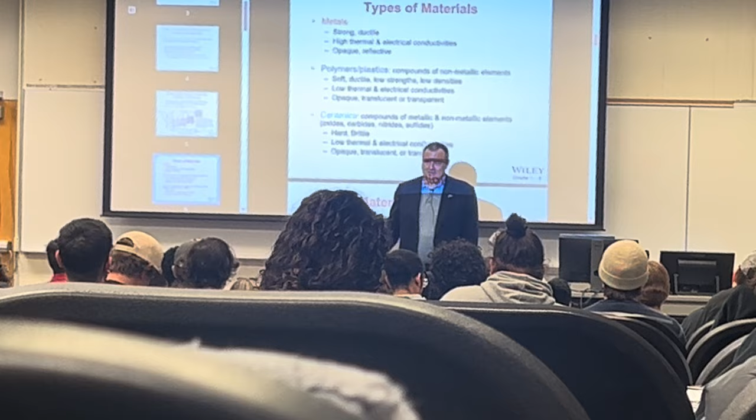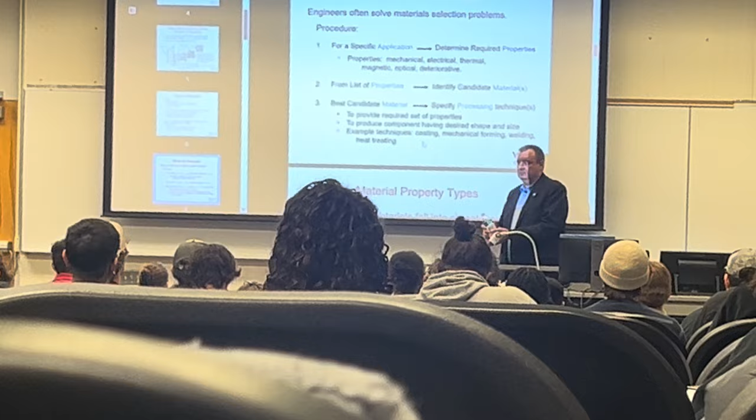And it doesn't break, but if I'm not lucky, I'll be cleaning up the mess for the rest of the class, right? So ceramics are intrinsically brittle. Polymers and plastic are typically ductile. But then imagine I put it in the liquid nitrogen, the whole thing. It wouldn't matter if it's plastic, or if it's metal, or if it is ceramic. When I drop it, it's going to shatter.

There are several ways to teach materials and engineering. So you would start from an application. And just like the beverage container, what is the set of properties that we're looking for? And typically there are mechanical properties, electrical, thermal, magnetic, optical, deteriorative.

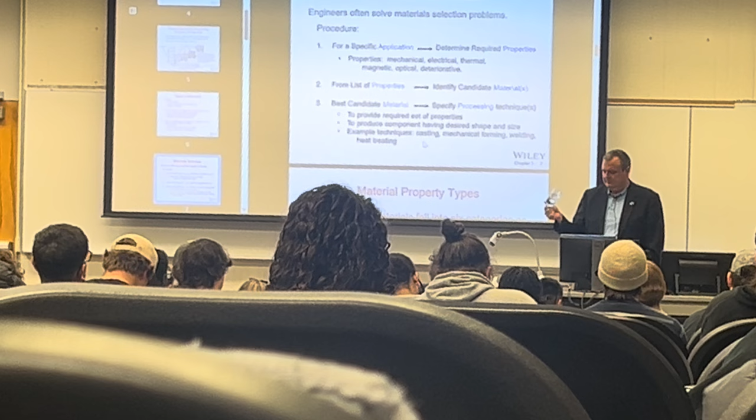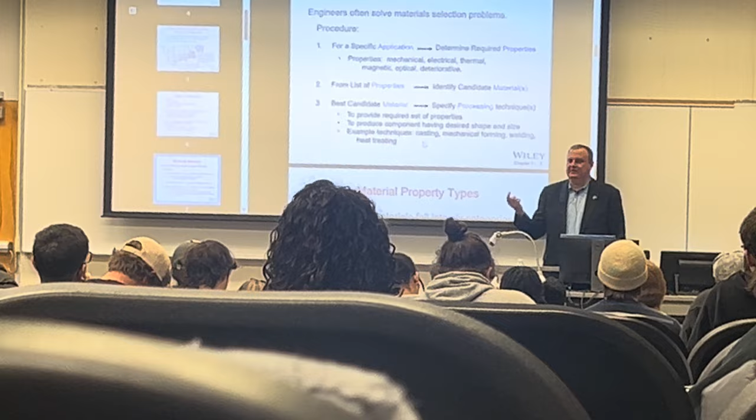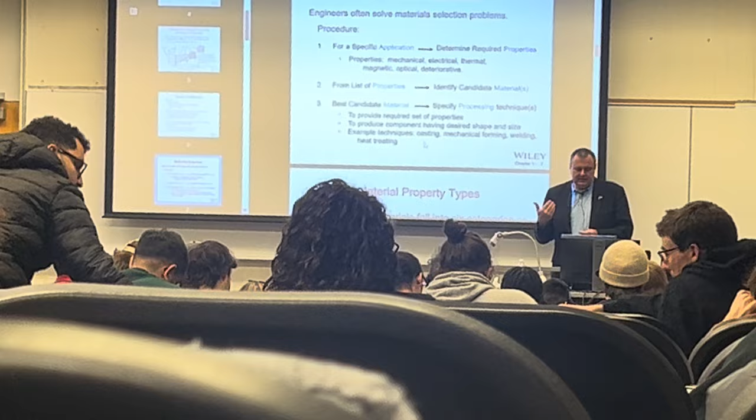A cell phone. What's the case made from? Not on this one. Well, I'm not talking about this case, I'm talking about the actual phone. Yeah, I don't know why Apple would take a metal that they used to have, it used to be an aluminum case, right, and put a glass on the back so that when you drop it, it shatters. It's just, to me, it's not a practical design because you're going to drop your phone no matter what. But basically, you're looking at a set of properties. And then you take those lists of properties and you get the candidates.

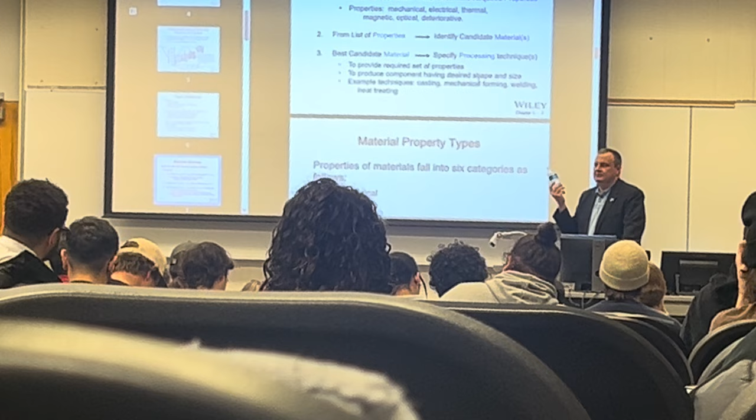What is this bottle made from? Okay, and what's that plastic made from? Oil. And what's oil made from? And hydrocarbons came from? Did you say stars? That's a philosophical discussion, but okay.

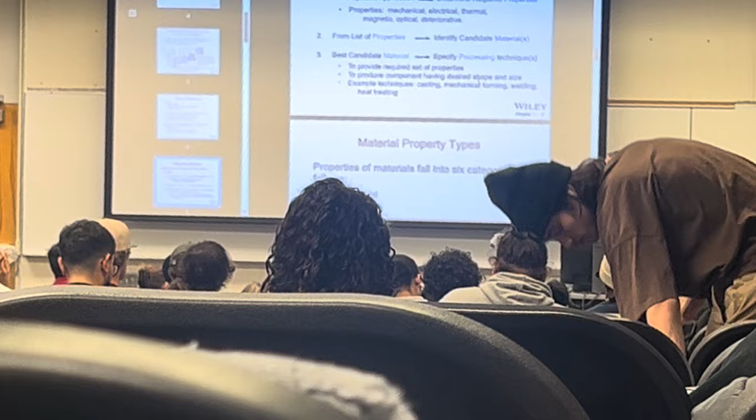So, even for the plastic, it needs to be formed into this kind of shape. And how did that happen? Magic. Boom! Turned into that shape. By processing, there was a process to make that. Right? So all of the parts for your car, they need to fit together. Somebody had to make a drawing.

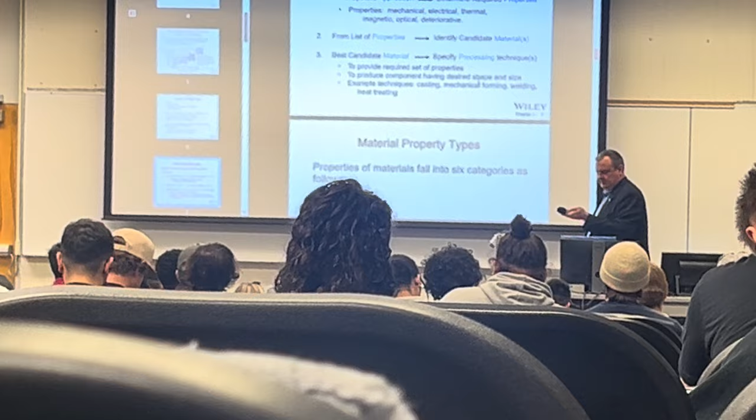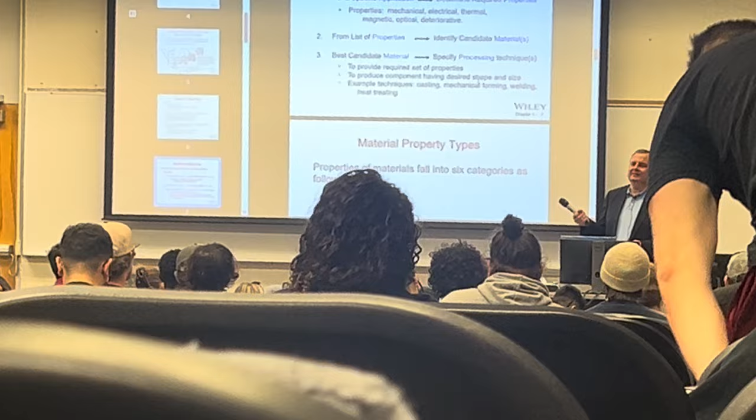You know, this microphone, 1, 2, 3, 4. This works? Yes. Make. I'm not going to mess with it, but looks cool. I went to the concert. Have you heard about Rammstein? Do you like that band? It was Till Lindemann. It was not Rammstein, so it's very different. Every time he finished, he would drop the mic on the floor. I can do that. We'll see how far I get destroying USF property, but you can do that.

Okay. Let's talk about those properties. Mechanical. Why are mechanical properties important for us? What kind of functionality? Yeah? To see how they might fail, right? You don't want things to fail, right? We're not making stuff to fail. Well, sometimes we do if we're talking about something that's consumable, but I'm not talking about that. Typically, they intend for the stuff to last, or at least to perform its function, right?

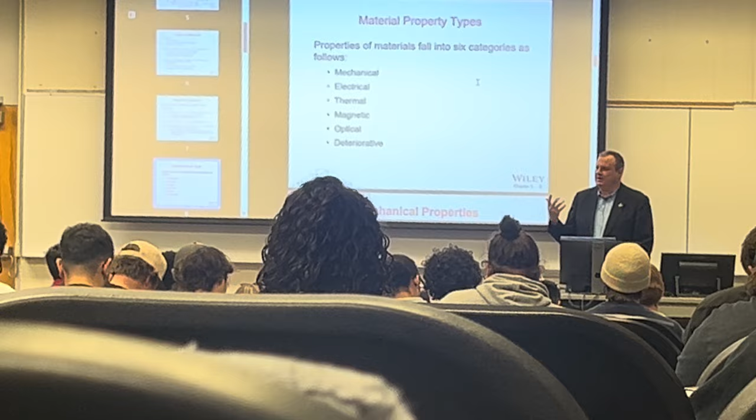Electrical properties may be important. Why? Yeah? Okay. For a beverage container, are those properties important? Okay. What about thermal properties?

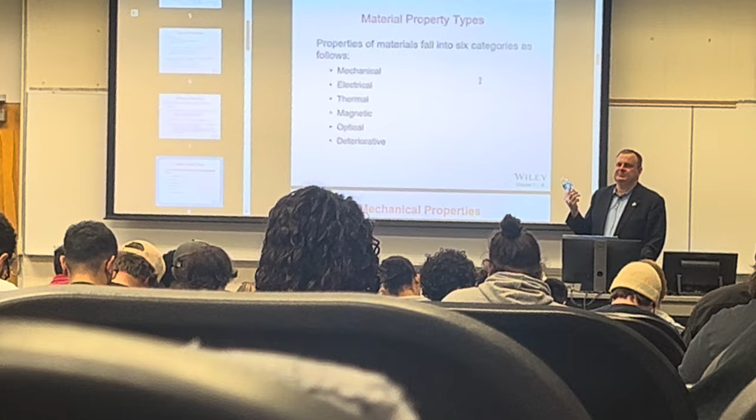Have you heard about this saying, he was born with a silver spoon in the mouth? Poor baby, because the mouth got burned all the time. Have you ever had a silver spoon in your hands? Have you ever used a silver spoon? The thermal conductivity of silver is very high compared to stainless steel. You put it in the hot boiling tea, you burn your hands. You put it in the baby's mouth, it's not a good idea. So thermal properties may be important.

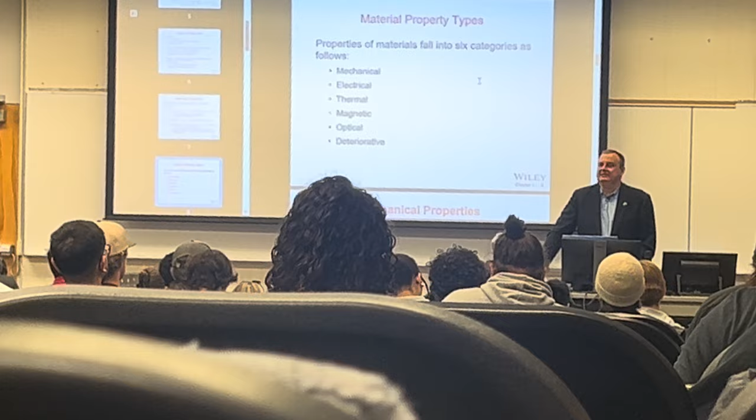In Florida, the delta T, meaning the temperature outside versus inside, is what? Maximum. 25. So the thermal insulation is important, but not that much compared to Chicago or Minneapolis or other parts of the country where it's minus 50. You know what I mean?

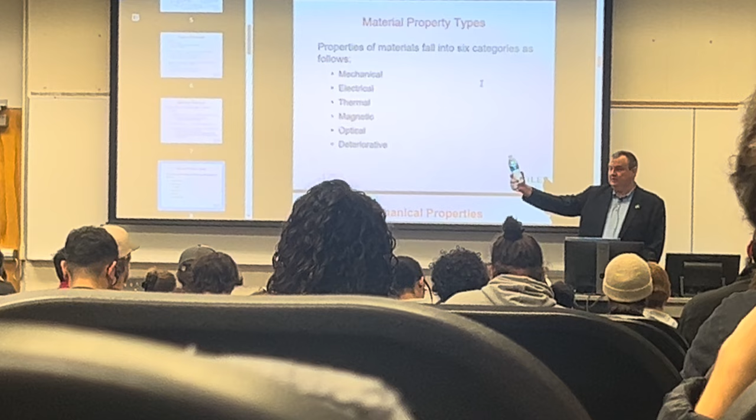Optical properties. Are they important? It depends on the application. For a beverage container, are they important? Well, they can be. If you put some beverage in a plastic that's transparent and this ends up in the sun on your dashboard, I don't know, maybe. Why are there different grades of glass for a beverage container? There's green glass, there's transparent glass, there's brown glass. Why? For that specific reason.

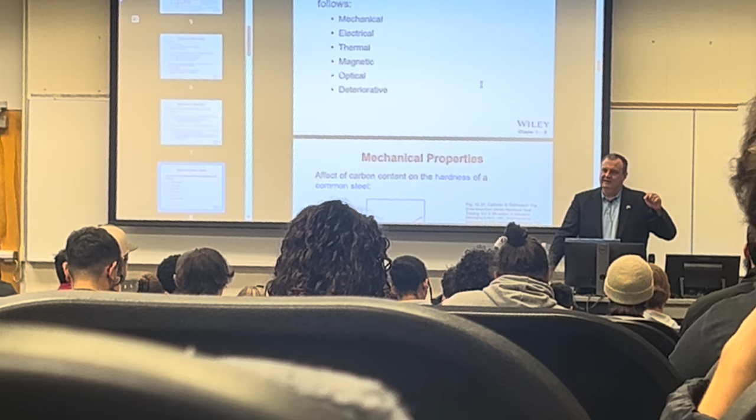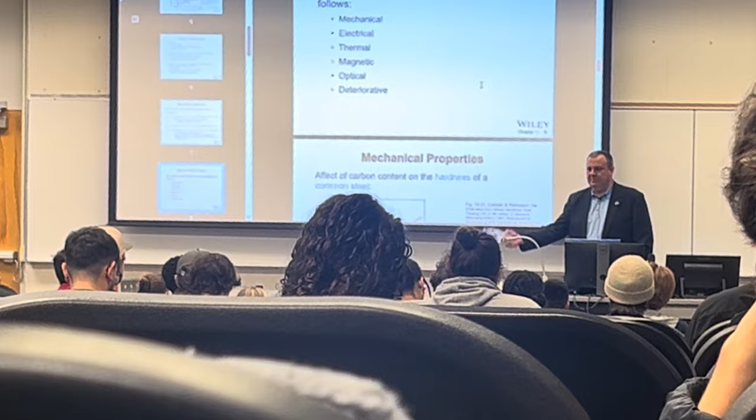Deteriorative. This is very important, the deteriorative stuff. Why? I don't know if you remember, but there used to be a flea market on Fletcher. Remember? There was a guy who was selling riding lawnmowers from Walmart, brand new. They used to retail at Walmart for over $1,000. He was selling them for $500 each. Why? Because they were that color. They were sitting in the parking lot in the garden section of Walmart, and they rusted in about a year. So Walmart just didn't want them anymore. Nothing wrong with them, brand new, but just the looks, you know.

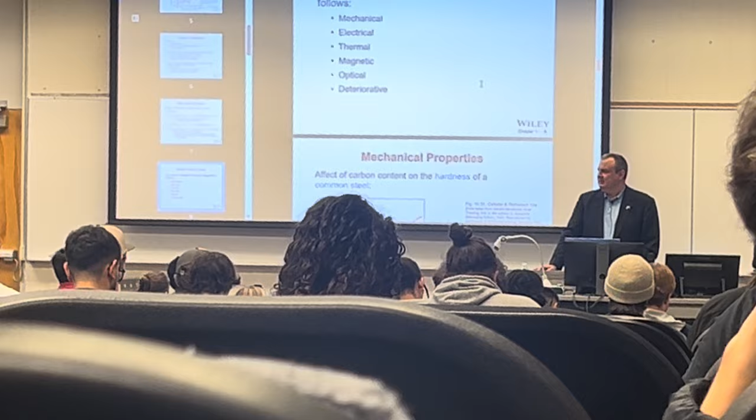We live in the material world, and we come from dust, and we're going to go back to dust. There's no way around it. Unless artificial intelligence would be able to somehow, I don't know.

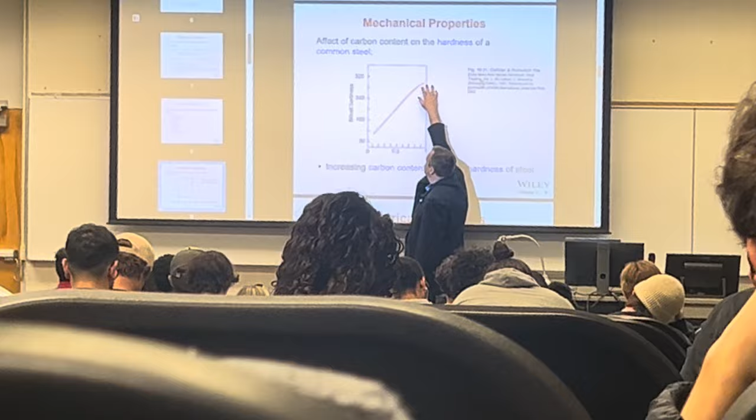Mechanical properties. Weight percent carbon. This is weight percent. We're going to talk about what weight percent, volume percent, all that. Carbon, 1%. The hardness goes from just over 100 to 300 by just adding 1% carbon to iron.

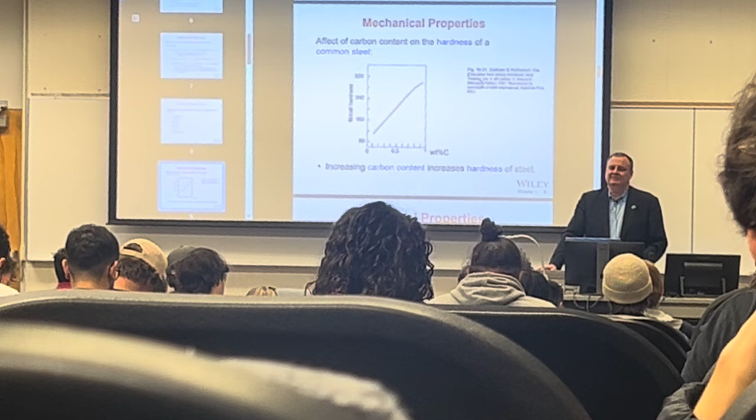To control the process, to control the structure, to control the properties. Please remember this. This is material science training. To control the process, to control the structure, to control the properties.

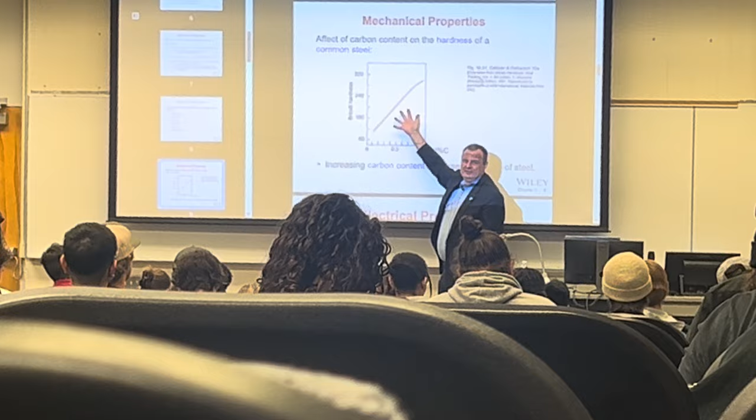Process is part of this. Your cooking process affects the structure, which is not shown here. There's microstructure that you need to look under a microscope to see what changes are there. And the properties, well, in this case, the hardness.

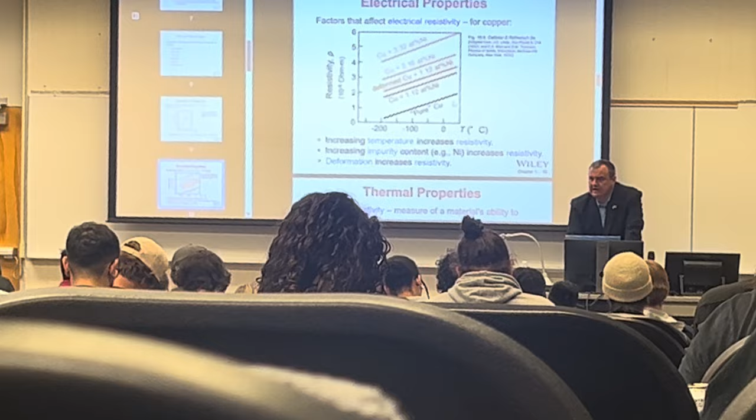Electrical properties for copper. Pure copper has very good electrical conductivity. This is resistivity, 10 to the minus 8 ohm meter, and this is temperature. This is pure copper. Pure copper is a very good conductor. This is why all of the wiring in this building and your house is made from copper.

Also, for the high-speed train, which I wish the United States had. China has it. Other countries have. The train can go 300 miles an hour. How does it get power? It gets power from a copper cable, and there's a sliding contact. So, if you make it out of pure copper, it wouldn't work.

So what do we do? We add alloying elements. But what happens is electrical resistivity goes up. So it's conducting less electricity. There are more losses and whatnot. So you can see here that increasing temperature increases resistivity. Also increasing impurities is increasing resistivity.

And also deformed copper. See, this is as-is copper and 1 atomic percent nickel. This is deformed copper, 1% nickel. Deformation also increases resistivity.

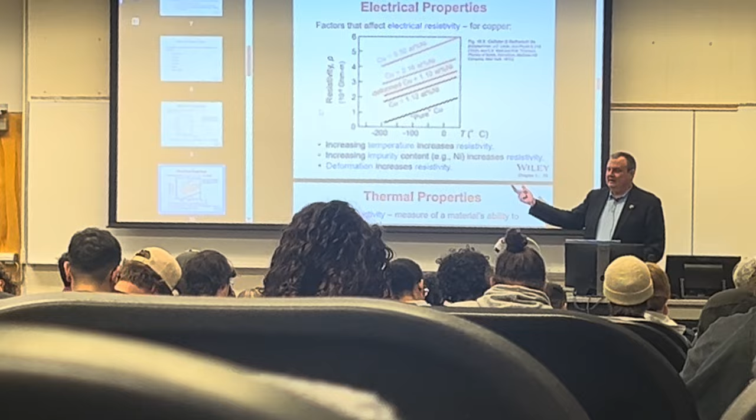You can go to Costco, you can buy chicken for $5, Sam's Club, the same thing. Or you can buy yourself a chicken for $5 at Publix and you can boil it. You can put it on the grill. You can make many, many dishes. It's still chicken, all right? So we have copper, and then we added nickel. And then this alloy was forged or processed by some sort of a method.

Thermal conductivity is a measure of a material's ability to conduct heat. The heat is only conducted in the presence of a temperature gradient, right? So if there's no temperature gradient, there's no heat that's being conducted. Does anybody know how heat is conducted in a metal? By what process? What particles transfer the heat in a metal in terms of the thermal conductivity?

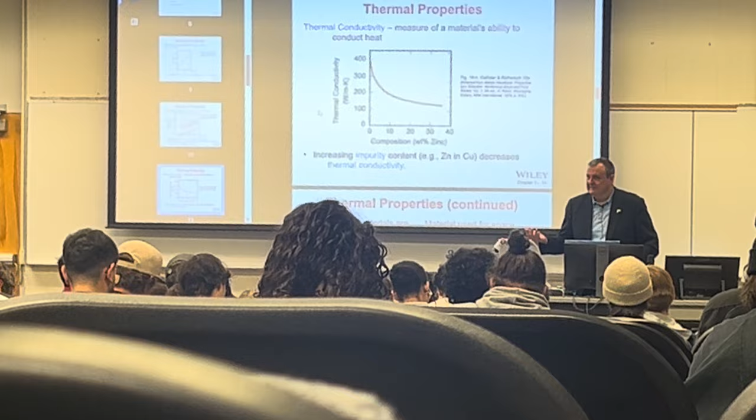Did you take chemistry? Ask AI how heat is conducted in a metal and give me an answer. I want an answer. How is heat conducted in a metal? By what? What's conducting heat in a metal? And electrons. Okay, good. We'll talk about that as well.

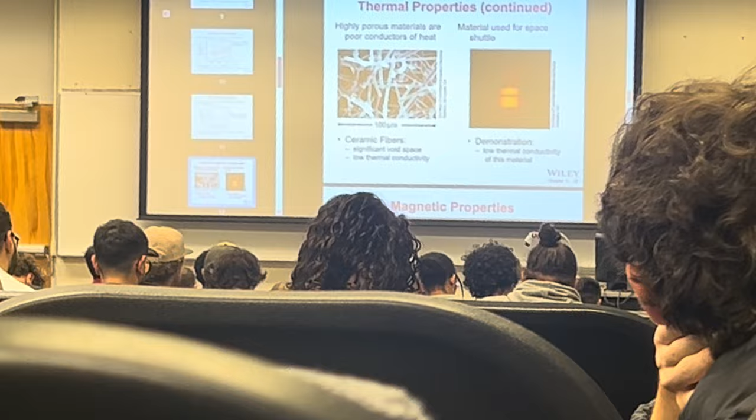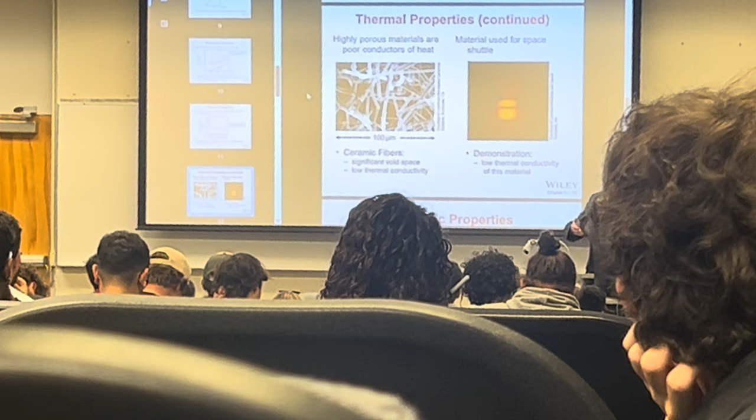Thermal properties. Here are ceramic fibers. And the best insulator, do you know what the best insulator is? Vacuum. Vacuum is the best insulator. How can heat be transmitted? Atoms. And there are no atoms in vacuum. Through light. Conduction, convection, and radiation. Right? Nobody told you that?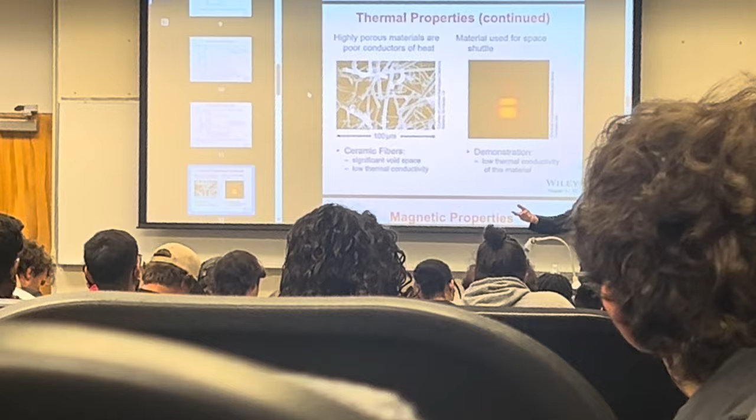You go into the sun. How far is the sun? Do you feel it on your skin? Yeah, so you get energy from the sun by the process of radiation. And by the process of conduction, you can get the heat, right? But you need physical contact. And what about convection? What is that? It's transferred through the gas, right? So there's gas coming out of my mouth that has a certain temperature, so that's convection.

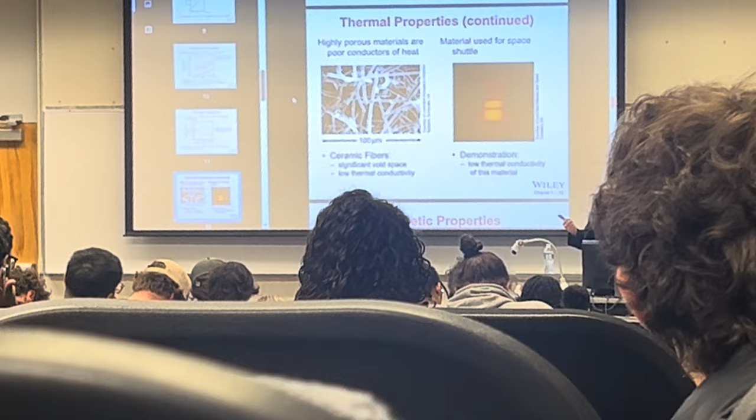In Dresden, I brought USF students who are very lucky, and I was very lucky. I had those grants from the National Science Foundation to bring USF students to Italy, to Germany, to Poland, and to China. Maybe one more country, but maybe not. We had a lot of fun.

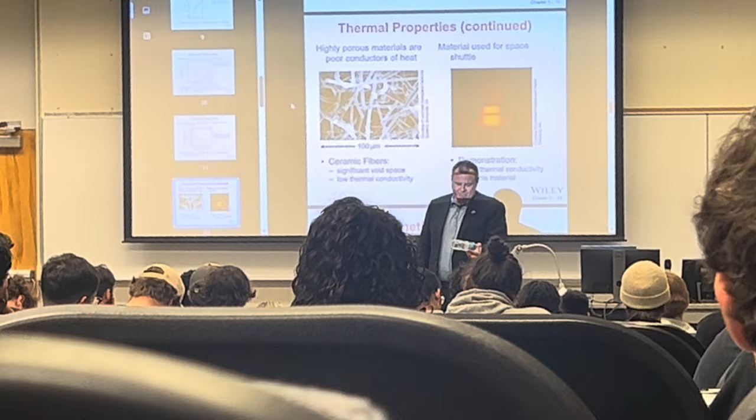In Germany, in Dresden, there's a Hygiene Museum. There's such a thing as a hygiene museum. If you ever go to Dresden, go there. And there's this device like this, and there are instructions, so you're supposed to touch it. And I go like this, and I immediately pull my hand off because I just burned my hand. And what that device has, it has a spiral pipe that goes around. Two of them go like this. One of them has warm water, and another one has colder water.

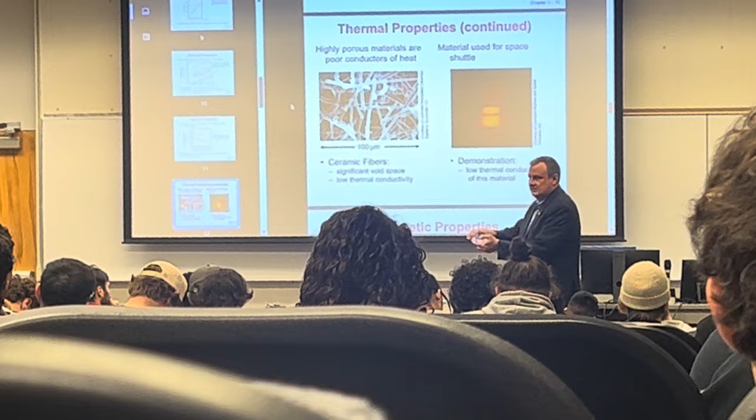So the way we are measuring temperature, we don't have a sensor for absolute temperature. We measure the delta T, the difference. So on a certain piece of skin, okay, and then I forced myself to just put my hand on this device.

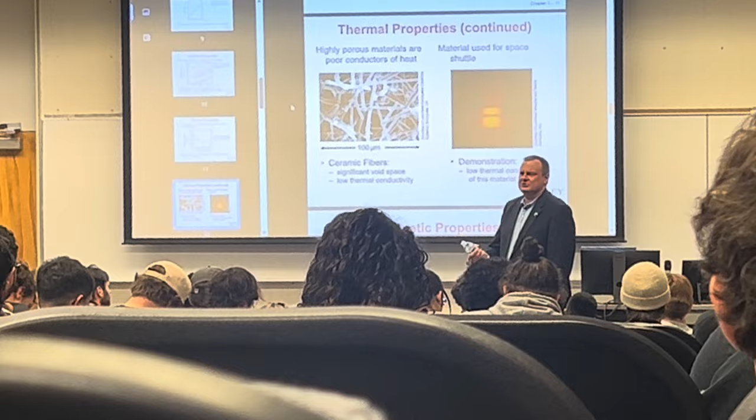I cannot tell you about this experience that I had. Because your brain is going nuts. Because part of your brain is thinking, oh shit, I just burned myself. And another one is thinking, oh shit, it's cold. And it's one of those moments in life that you should experience. If you ever want to conduct a lab, that's another one. At some point, I'm going to bring rubber bands, so we're going to do this experiment, because your lip is also a very highly sensitive temperature sensor.

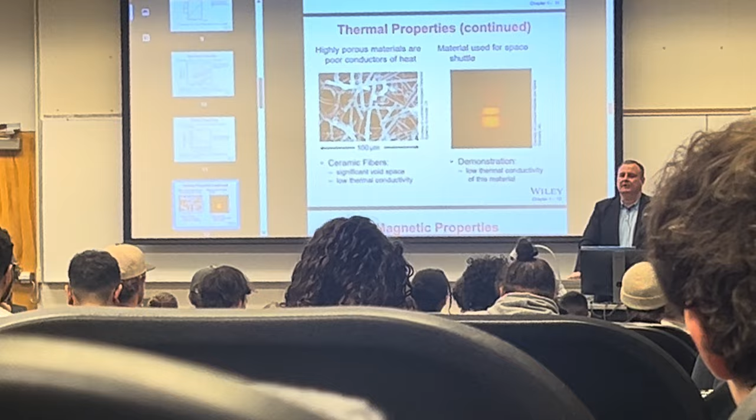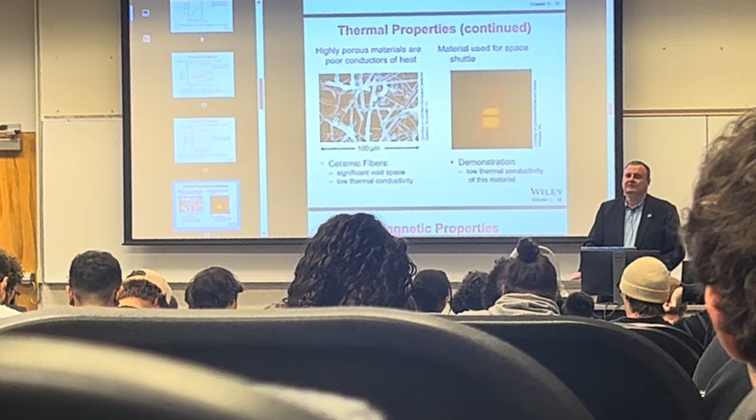Bottom line is also, tell me at what temperature materials start to glow. Ask your friend. What temperature? There's Gemini that's built into Google now. At what temperature does material start to glow? Give me an answer. Like, if you don't know, it's okay. You didn't fail the class. You have a friend that can help you. 977 degrees Fahrenheit. And how much is that in Celsius? 525. Okay. If you see something that's glowing, don't touch it. Because it's hot.

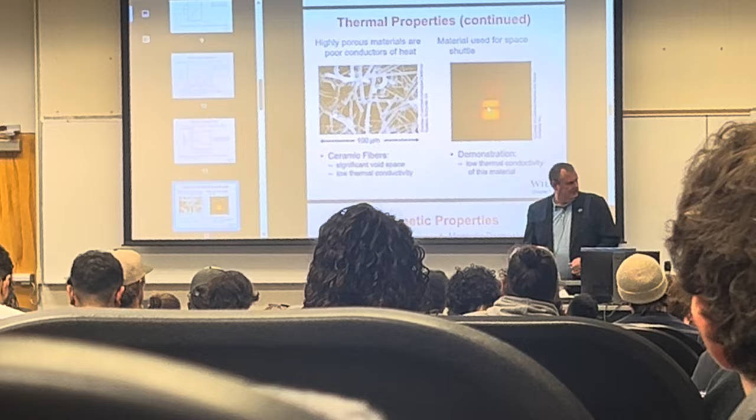All right? Now, with this material that has air, and a lot of it, and just the fibers, you could be at very high temperature on one end and not burn your hand on the other. You see this person? This is aerogel. Are there lights? Where are the lights? Do we have lights? Oh, here. Is it better? You see that? He's touching it.

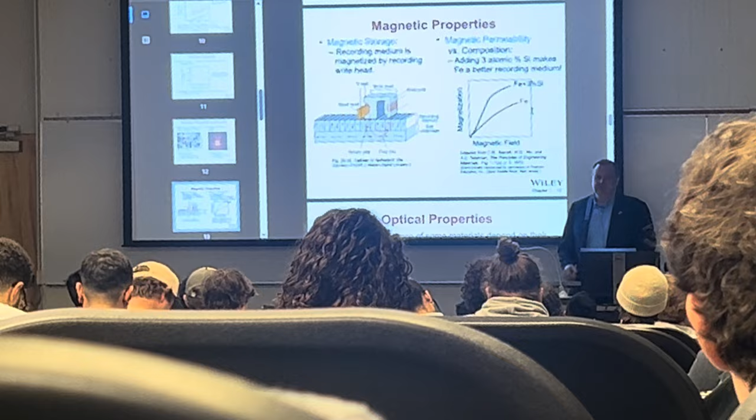Magnetic properties. Still have your hard drive? No? How big is your hard drive? Now, why is it called a hard drive? Because it's hard? Discs that it reads off of, like a physical disc that's spinning. This is media, and the media could be even the cassette tape, and it could be analog, or it could be digital. Here's magnetization versus magnetic field. This is iron, and this is 3% silicon added to iron. So if we add a little bit of silicon to iron, it becomes a better medium for recording magnetic information.

The last cell phone you bought, did it come with a charger? No, so you have to use your old charger. I used to work for this company called Motorola. Have you heard about that company? Do you know what was the first commercial product that they made? You don't know? It's called a battery eliminator. Back in the day, you had to buy batteries for most of your portable devices. So a battery eliminator was just a power supply that you plug into the outlet, and you get DC power on the other end. And back in the day, it used to be a transformer.

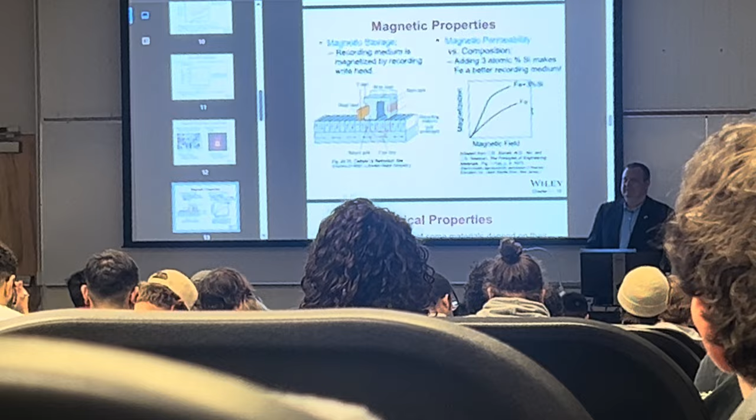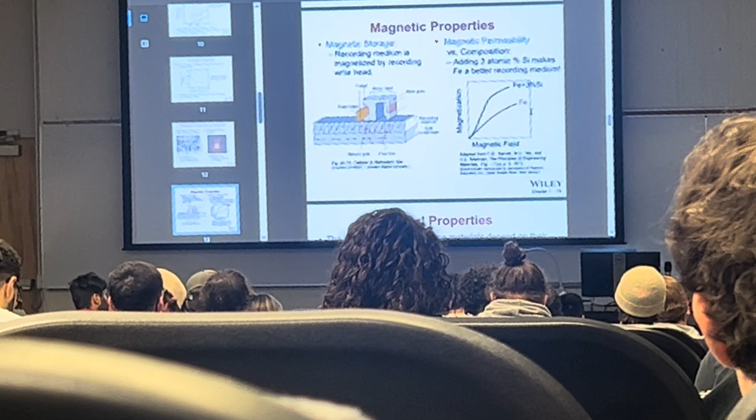You know what a transformer is? What is a transformer? How does it do that? Yeah, what's the process called? Does anybody know? No. Transforming. It's called induction. When I was a kid, I learned that trick in physics. I would take a nail and a copper wire and wind it, and take another wire and wind it on the same nail. And yes, I used to stick it into the outlet. That's why I became super powerful. But anyway, bottom line is that adding 3% silicon, 3% is not a lot, right? But it boosts it, it doesn't show you the scale.

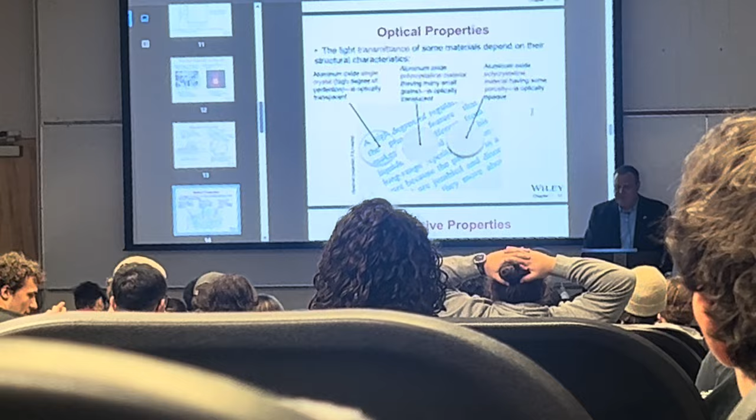Optical properties. Aluminum oxide. Chemical formula Al2O3. I'm gonna teach you something which is really cool. Aluminum is a metal. The chemical formula is Al. Alumina is a ceramic, and it's a compound of aluminum and oxygen, Al2O3. This is a single crystal called sapphire. This is polycrystalline, it's translucent. And this one is porous, and it's not transparent. Chemically, exactly the same material. What's the difference between those three materials? Chemically, none.

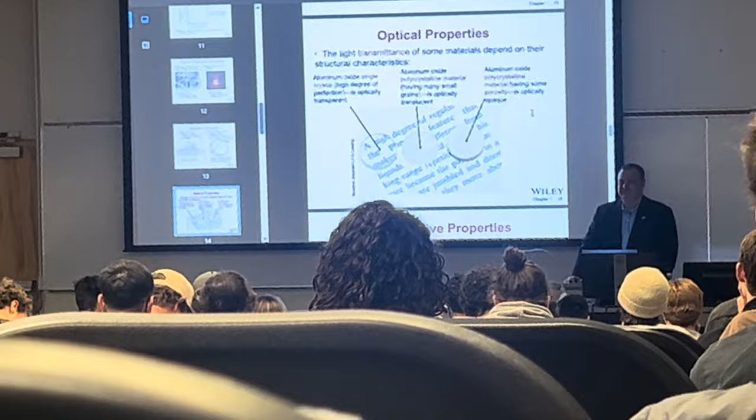Does anybody have a pencil? You have a pencil? What's the core of the pencil? Graphite. And graphite is carbon. Does anybody have a diamond ring? Anybody? Yes. What is that? It's a diamond. What is it made from? Carbon. There's a big difference between the core of the pencil and that diamond, right? And we'll talk about it. Looks good, right? You can get the spectrum. Deteriorative properties.

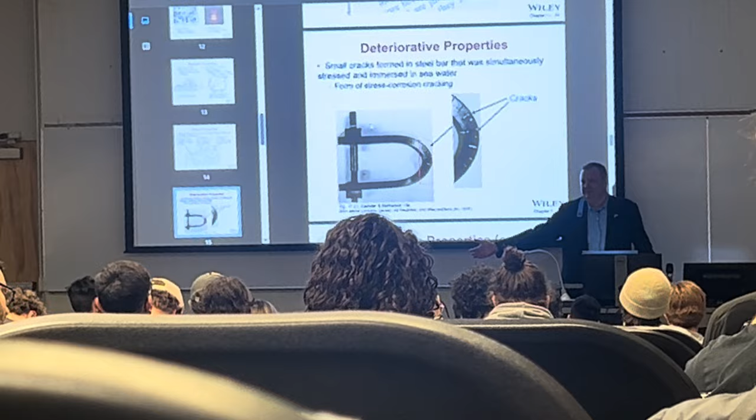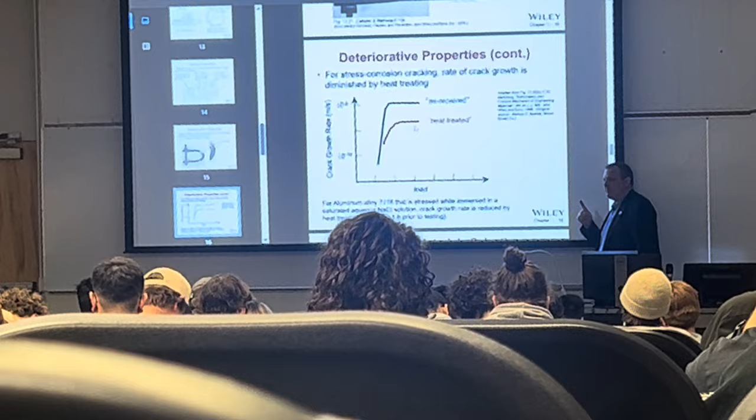Okay, crack growth rate versus load. This is as received, this is heat treated. You can see that the crack is growing at a slower rate if this material was heat treated. What would be the process in this case? What is the process? Heat treatment. What are the properties? Crack growth rate. What is the structure? It doesn't tell you. So, if you want to publish a paper in material science, you have to address all three: to control the process, to control the structure, to control the properties. So the rest of the class is going to talk about that.

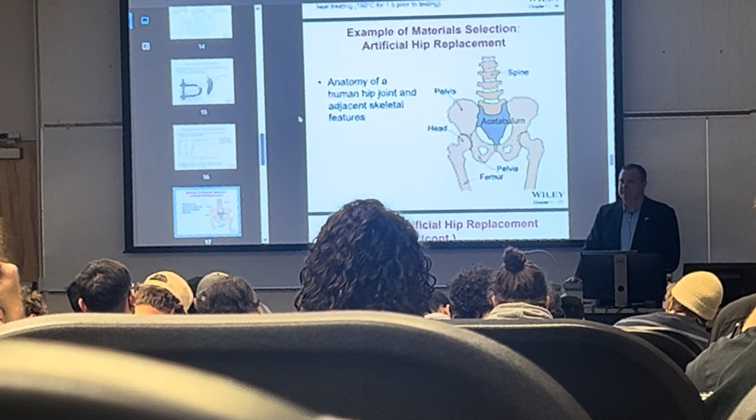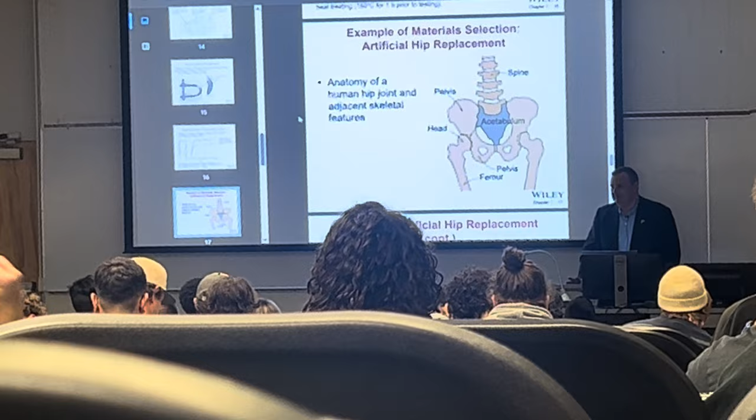I actually know a person, she's a nurse, she had a hip implant, was in a lot of pain, but my neighbor here has 2 knee implants, and the reason he did that, he was a postman all his life. Hey, wait a minute, Mr. Postman, get your knees replaced at Tampa General Hospital. He does play racquetball after those knee replacements. Technology allows our physical bodies to last longer than they used to, right? It's all about quality of life, I can tell you. It's very important for a human to have mobility.

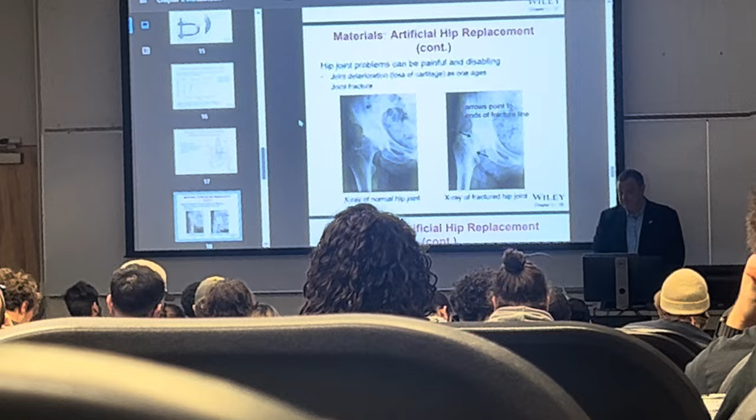3 of my grandparents had this kind of fracture. And they did not have a hip implant, and the quality of life wasn't very good. But nowadays, it's replaceable.

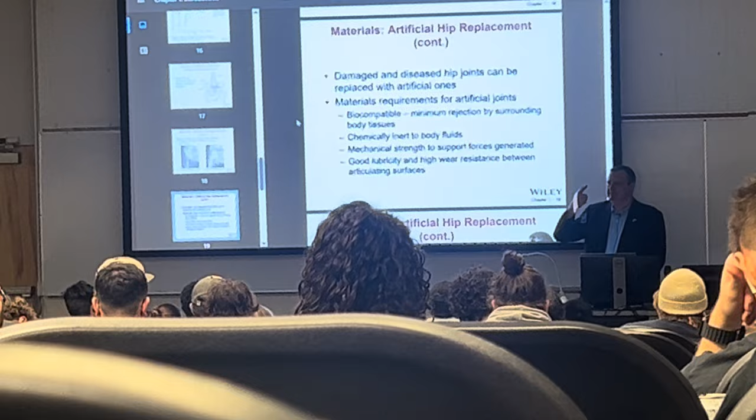The first requirement, it has to be biocompatible. Have you ever had a sliver that you didn't take out? I mean, it's a tedious process. You have to have tweezers. What happened if you didn't take it out? You didn't have any experience? Inflammation and pus? And your body kind of eventually rejects it, if it's superficial sometimes, right? Imagine putting a chunk of metal inside the human body. What happens? All sorts of interesting things happen. So first, it has to be biocompatible.

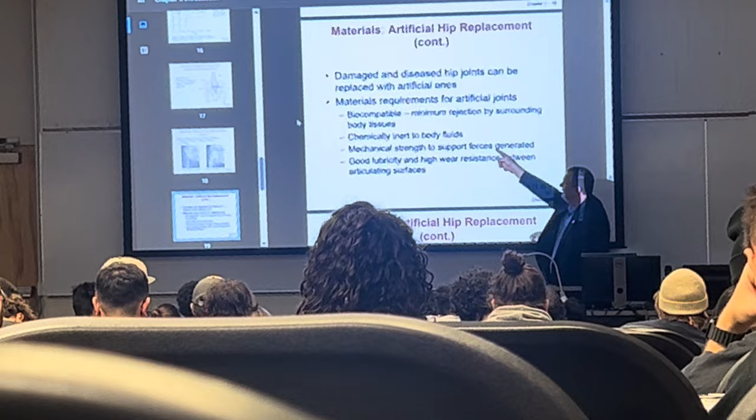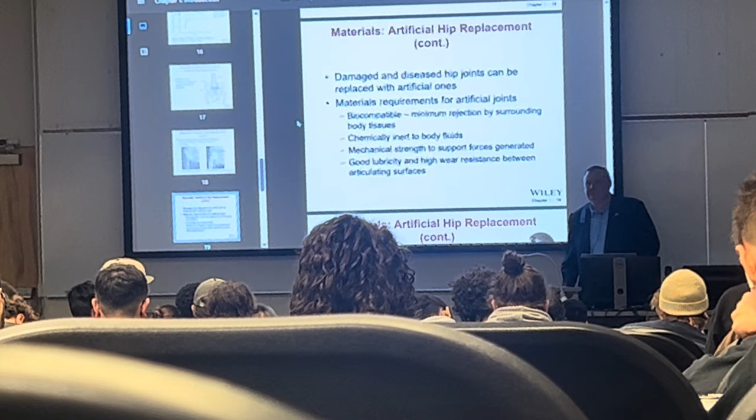It has to be chemically inert. Metals are not chemically inert, so how can we fix that? Well, there has to be some sort of a coating. They have to be physically, mechanically strong to support the forces. You know, I'm not fracturing my hips. But if I fall, and the older I am, the more brittle the bones are.

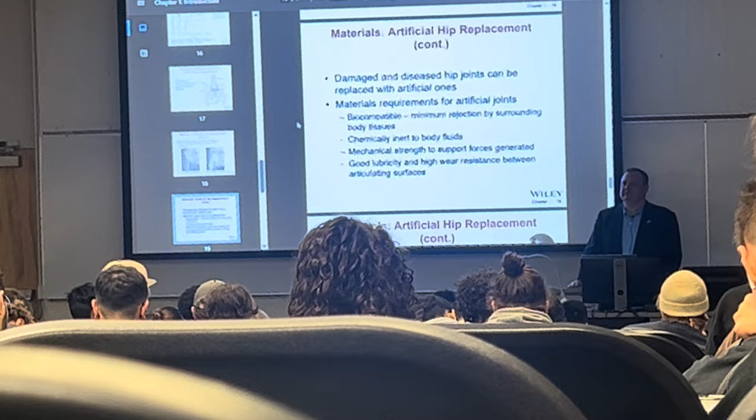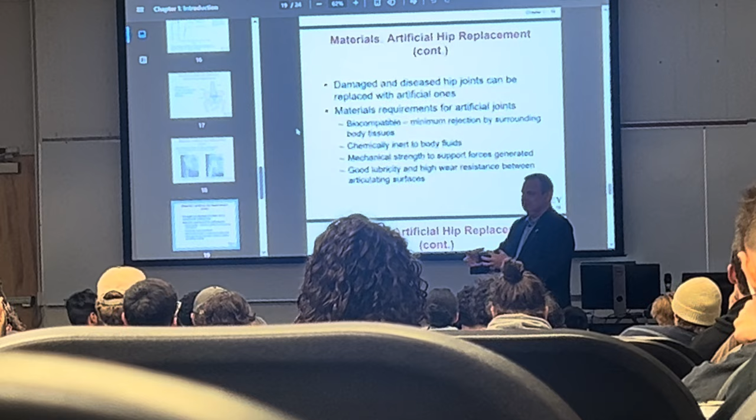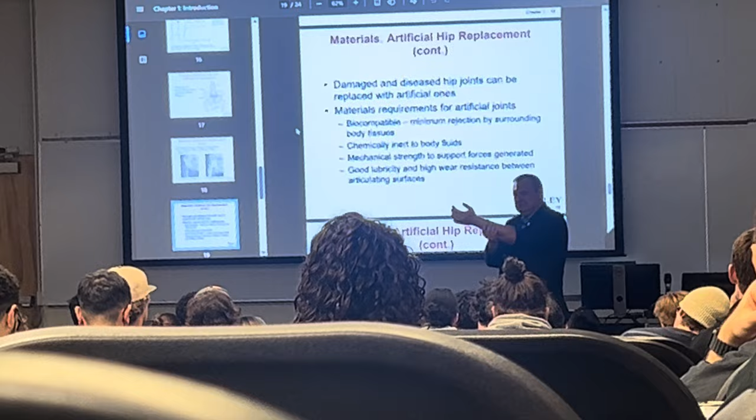True story, I was 12 or 11, and the teacher didn't tell me what to do. You're supposed to do the flip, and I jump, and I see my hand here. I had a fracture here. And then this guru professor, who was extending people's limbs by breaking them and putting on an exoskeleton, decides to take my hand and fix it. Instead of fixing it in a neutral position like this, he fixed it like that. And after 2 weeks, this bone moved, and my arm started to grow crooked. So they had to put me under again and break it, and it's still okay, I guess. Sometimes when you're too smart, it actually hurts.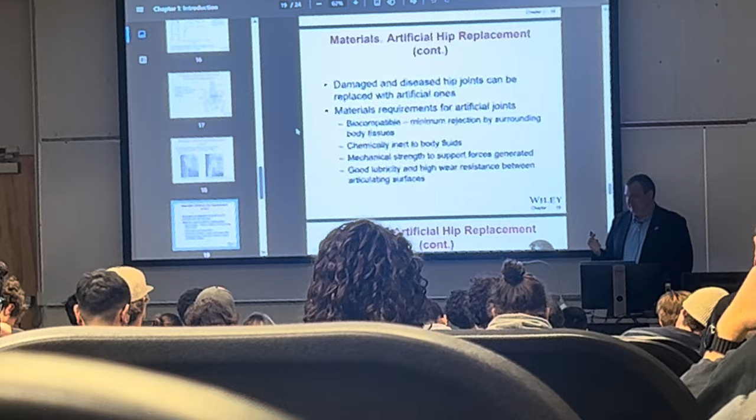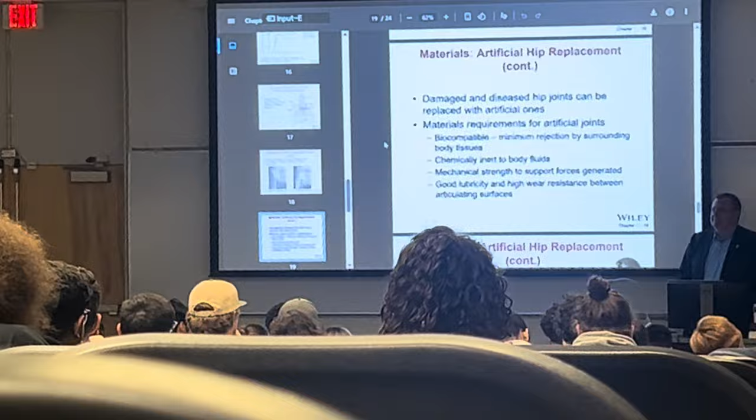Oh, there has to be lubricity, right? Why do people need to get their joints replaced? Do you know why? Well, they wear cartilage. That's this natural layer. My buddy was playing rugby. He's from Akron, Ohio. At age 23, needs a knee replacement. He's in his 50s, my age. He still did not replace his knee because he just worked out, and he's a really big guy. So he has the muscles holding all this stuff up. That's one way of doing it. And he's in a lot of pain.

My other friend Marcus had this. He's a much younger guy in his early 40s. And they tell you now, right after the surgery, you're supposed to keep walking. The sizing was done incorrectly, so the femoral stem cracked his bone. He got into a lot of pain after that.

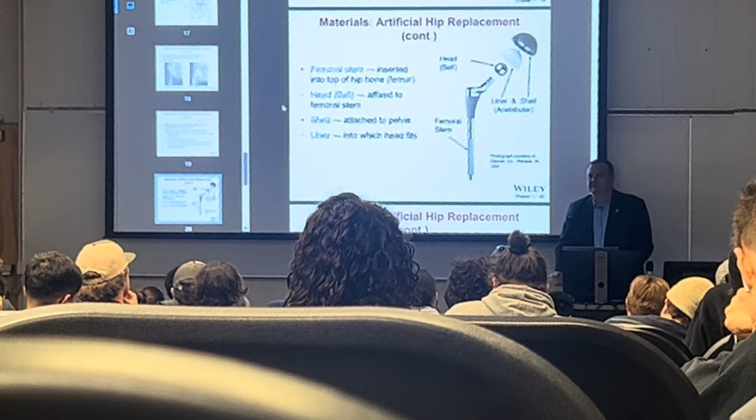I can tell you the problem with hip replacement is that the lifetime of a hip implant is less than the lifetime of a person. So if there's a hip replacement that happened once and it's made out of titanium, there's a very high chance that a person in their later age would have to go through this procedure again, which sucks. So if we can create a material or a system that is better than this, cobalt chrome moly. Cobalt is a nasty, toxic material.

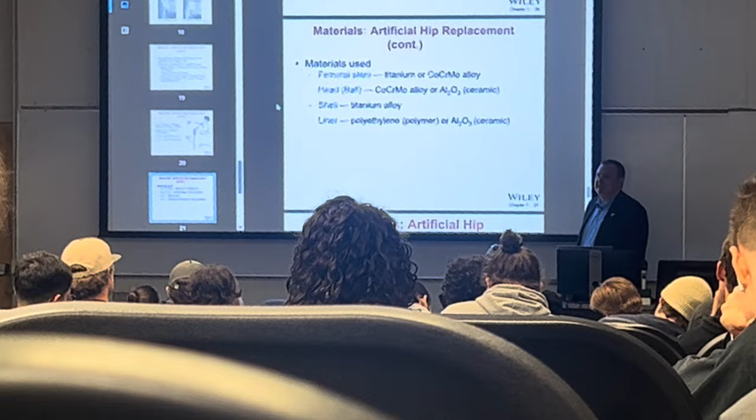Titanium nitride is much better than titanium. Nickel titanium, nitinol, is even better than titanium, but certain companies invested a lot of money in titanium. So for different parts of the artificial hip, different materials are used.

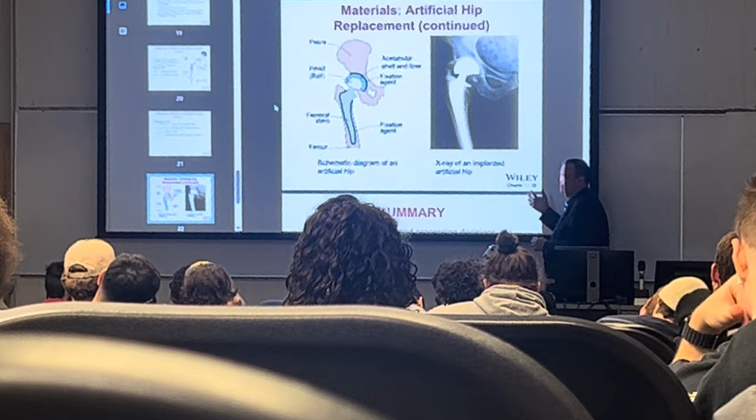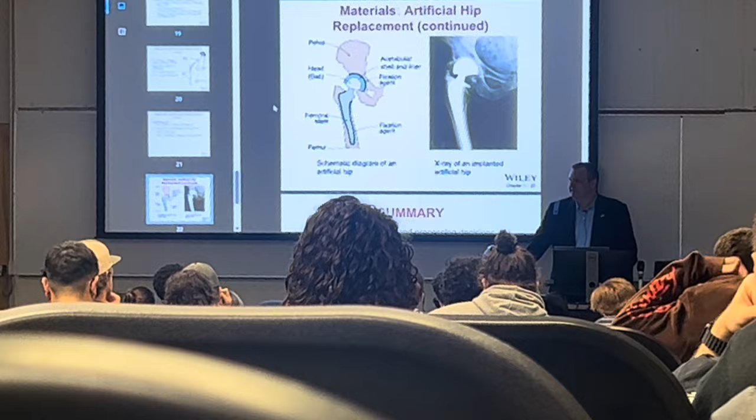Would you rather be able to walk? That gives you the functionality. Yes, it may be toxic. Yes, you may have to take painkillers. Yes, you're not going to be a Superman. But if you are, Steve believes his knee implants are better than his original knees. He plays racquetball every other day. He's a retired postman. Catches sharks every other day too.

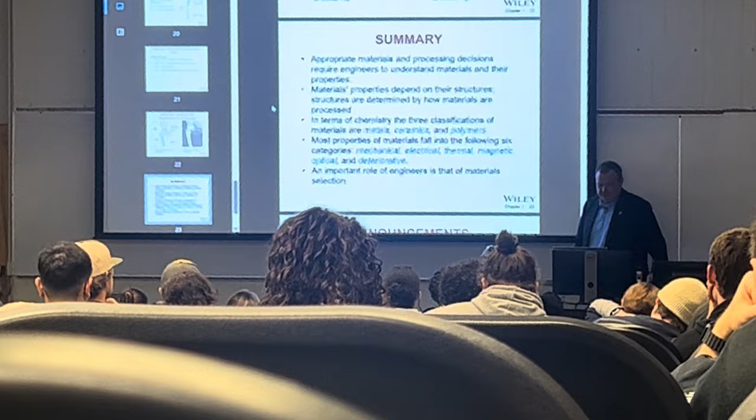This is the reason why we need to understand materials and their properties, which depend on the structure, which depends on how they have been processed. Three classes of materials: metals, ceramics, polymers. Properties: mechanical, electrical, thermal, magnetic, optical, deteriorative. And why? Because we need to be able to select materials.

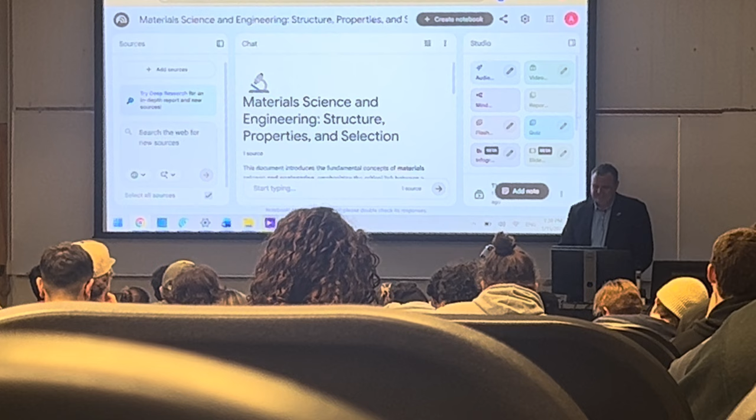Let's see how NotebookLM did. Let's start with, which one was first? I would anticipate that maybe 10% of you would actually do this, but I'll show you how cool this is.

And so how can I get this? There's an HDMI cable here, right? Supposed to get the video... somewhere in the settings. All right.

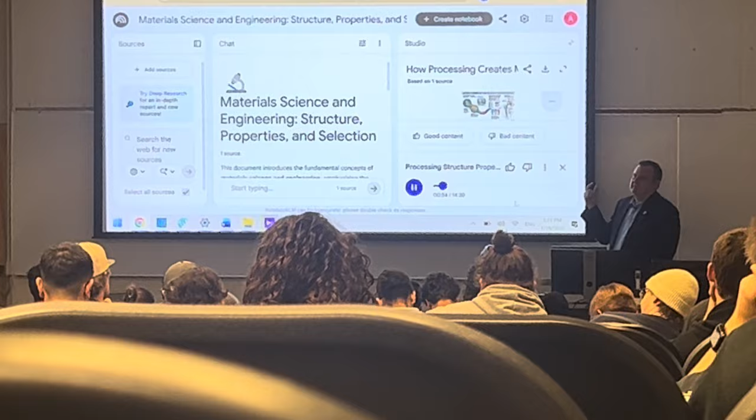Why is mastering this knowledge so critical? That's our mission today. We want to unpack the cornerstone relationship that governs every material. This constant cycle links structure and property. Get those three and you get everything. If you understand how those three connect, you pretty much have the blueprint for how our entire physical world is built. Okay, so let's unpack the discipline.

Some of us are better listeners, some of us are better like watching, everybody's good with hands-on. There are two sides to this, two sides of the same coin. One side is materials science, the really deep fundamental investigation, the research into how a material's internal structure connects to its external properties. This is often where brand new materials get invented. You should think of the material. This is interactive, meaning you can type a question here.

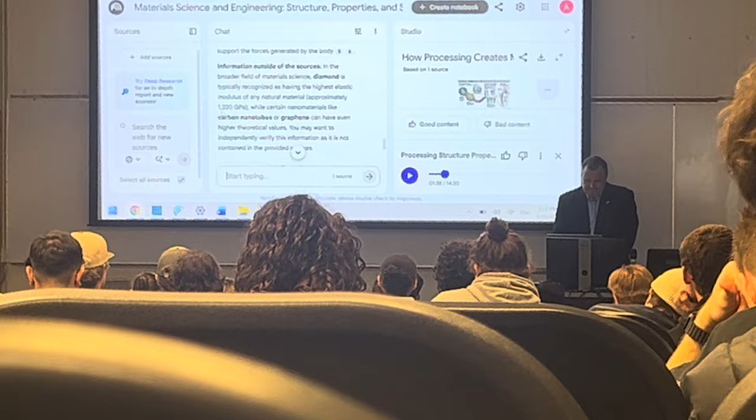What material has the highest elastic modulus? This information is not here. It gives you something, look at that. 1200 GPa. So you still got an answer.

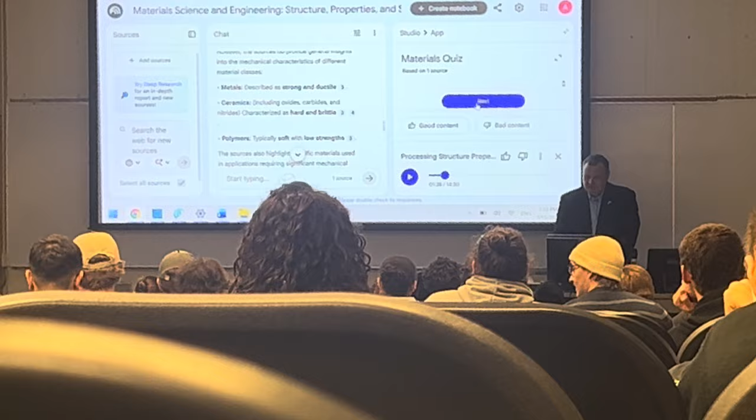Again, this class is not about AI. But look at the slides. What's that? There's a quiz.

All right, are you ready to do the quiz? We'll do it together, come on. Previous. Which statement describes... see, I can't see. And that's what's going to happen to people when they get older.

Which statement best describes the primary focus of materials engineering as distinct from materials science? Oh, that's a deep one. Categorizing materials into classes like metals, polymers, and ceramics based on chemical composition. Creating useful products from known materials and refining the methods to process them. Developing entirely new materials with known properties from theoretical principles. Investigating the fundamental relationships between the atomic structure and the properties of materials.

What's the difference between engineering and science? Yes? The application. Developing entirely new materials with known properties from theoretical principles. Are you sure?

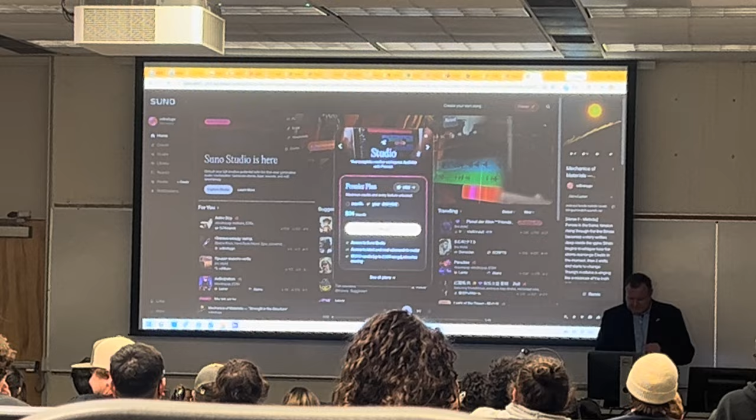But once you have the lyrics, there's a website called Suno, and there's an app called Suno, and you can create your own song. I'm not here - you go to the studio is what I've created. See, they want to sell me something. I guess if I go into the studio, they still want to sell me something. I don't know why, but it used to be free.

You go in here and you put in the lyrics, and over here you put in the style. So, don't film it.